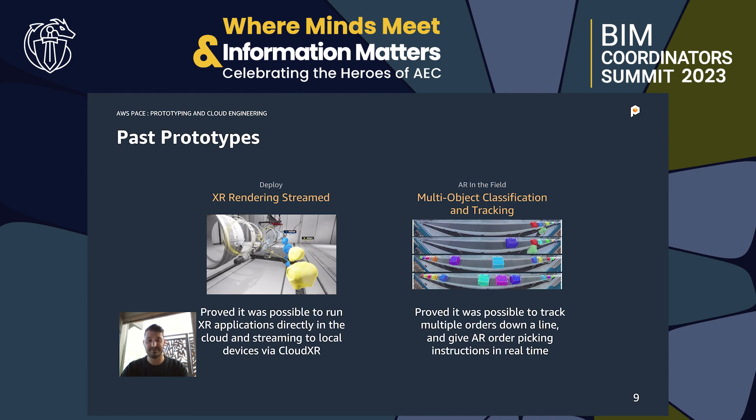Our team is not specifically focused on AEC and real estate and digital twins, but we do work on those quite a bit here and there. Since I am sort of the AEC expert on the team, I am working on those projects more frequently. A few past prototypes, fun things that our team worked on: XR streaming, some computer vision, object classification, photogrammetry, so 3D scanning pipelines for NeRF and LiDAR and photogrammetry, so reality capture mechanisms, and then NVIDIA's Omniverse and how to deploy that on our infrastructure.

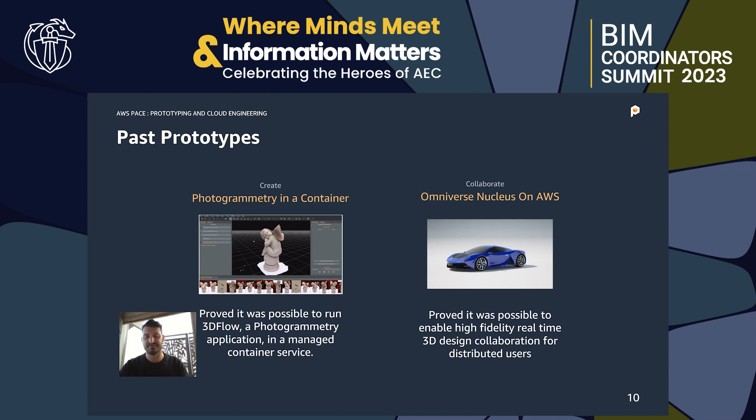I want to take a moment there to talk a little bit about AWS itself and what AWS is. I'm sure a lot of you already know, but if you don't, AWS was born because Amazon built Amazon.com, and it was one of the most scalable web applications and web infrastructure out there. Amazon.com needed to be accessible and secure to millions of people on Earth. We realized that the infrastructure they built could be useful for anybody trying to build any type of application or workload on the cloud. So that's what AWS is: it gives anyone, any company, any developer the ability to access and build on top of the same infrastructure that is used for Amazon.com.

So a little bit of overview of spatial at AWS. There's lots of spatial problems now.

Three-dimensional data is inherently important to every industry at this point. More stakeholders are requesting 3D model data. Stakeholders are more distributed, and the physical and the digital worlds are converging. Speaking to digital twins, immersive hardware is more scalable. The tools, the physical products are getting better and better.

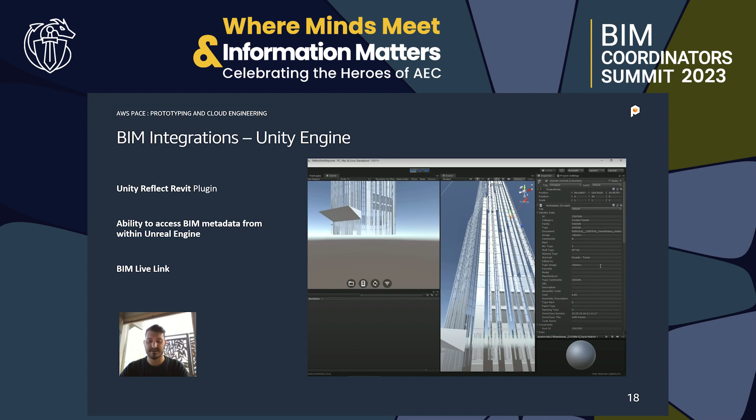One is in game engines. We talked about these game tools that are so exciting. How do we bring this building information model data into game engines, into Unity Engine and Unreal Engine? You're able to now access all of this building information model data in these real-time engines, which allows so many different use cases because these game engines are able to develop and deploy applications to many different mediums.

In a real-time engine, you're not just building a mobile application or a web application. You could also be building a virtual reality application, an augmented reality application, an application for a VR cave, some random hologram device, or any medium. This is a cross-platform development ecosystem.

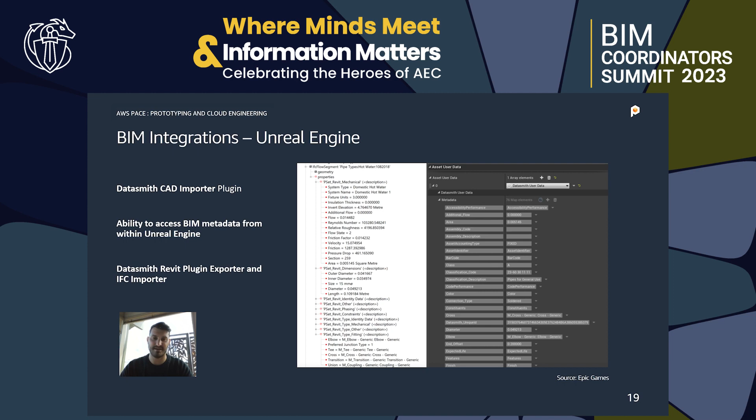So now you're exposing this BIM data to develop applications for anything. And that's really exciting. So Unreal Engine - Unity has Unity Reflect, which makes that really easy. Unreal Engine has the Datasmith CAD importer plugin, as well as the Datasmith Revit plugin exporter and an IFC importer. So there's multiple ways that you can get this embedded metadata into these applications and then start building business logic around that.

So those are both real-time engines, so you can build for many platforms. And then there's also web, which is really, really important. Autodesk Platform Services makes it really easy for people to build web applications that are pulling 3D model data and its embedded metadata into web applications, and then you can build business logic around that.

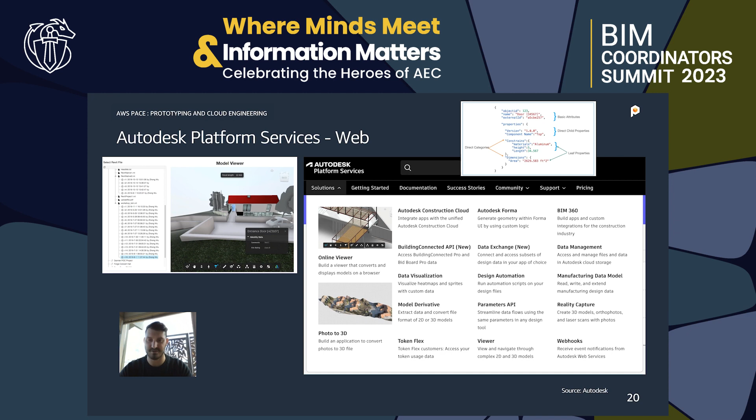So all that's to say is that now we can grab that BIM data and those 3D models into any type of application and expand and build and tie into all of that existing work that we've done, that we've put into building those 3D models. And that's really exciting.

So some fun topics that I want to cover here in the end of the presentation. The last bit here is we need things to become easier still, right?

If you wanted to tie in this interoperability and build a custom tool, there is a certain level of software development experience that you need. But there are a lot of out-of-the-box tools that are making it very easy to leverage this information without needing those skills. So I'll talk a little about some of these abstractions - this is a really important piece, abstracting a lot of that complexity away.

Another exciting thing to talk about is a tie-in between LLMs, large language models, and BIM - AI and ML, and how it's related to building information modeling.

It's so exciting that, at least from my perspective, when I used to click on an air handler, or a duct, or a piece of machinery in a BIM model, and I don't know anything about this piece of machinery - it has its product number and product name and some additional information, maybe volume or dimensions, I don't know what that is. It would be incredibly helpful for me, even through the design and development experience, let alone facilities management and operations, if I knew additional information about what this was, potentially how to maintain it, how often it needs maintenance. So we'll talk more about this, but tying LLMs to building information models to create actionable insights is really important.

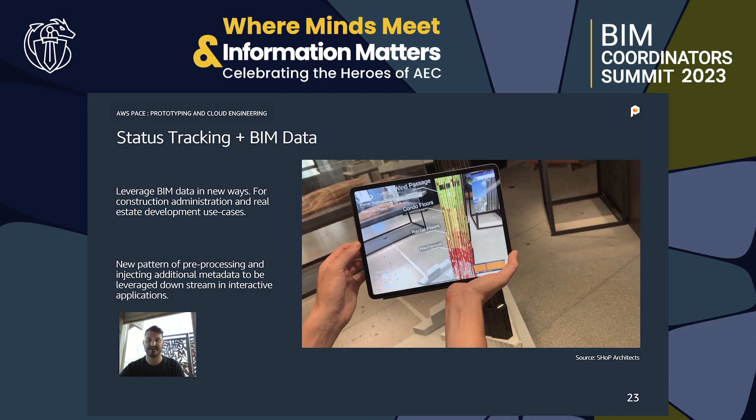So let's dive into some immersive mediums. Huge shout out to SHoP Architects for providing some of these videos - that is my alma mater, and I got to work on some of these applications.

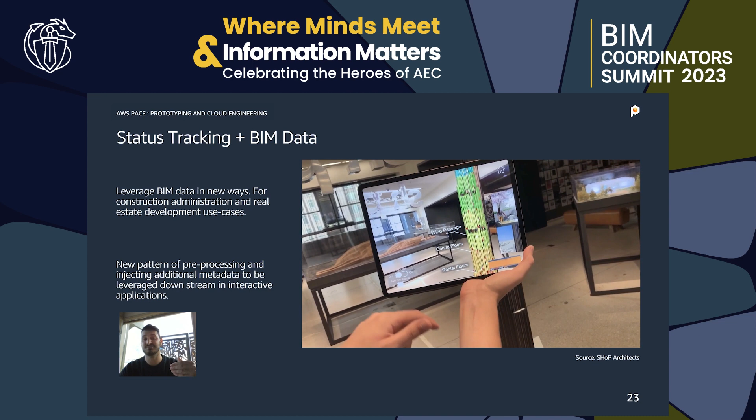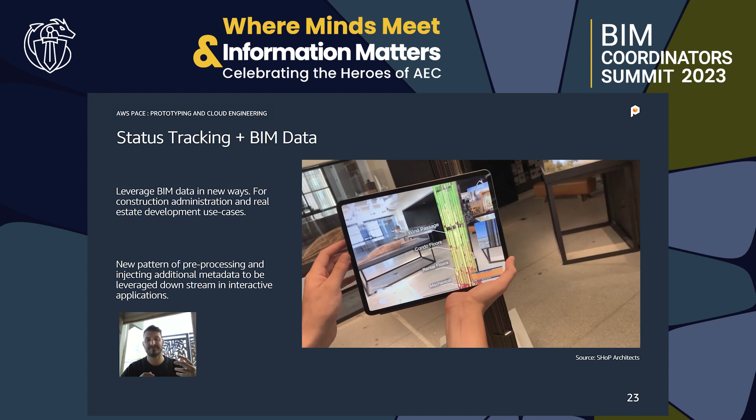This is a Unity application where we're tying building information model data directly into an augmented reality application, where we're clicking on the panels, the window panels of this tower, and these panels have embedded metadata to know their status - whether that panel has been installed, still needs to be installed, or if there's a crack in it. All of that embedded metadata can now be viewed and interacted with in a new, intuitive medium.

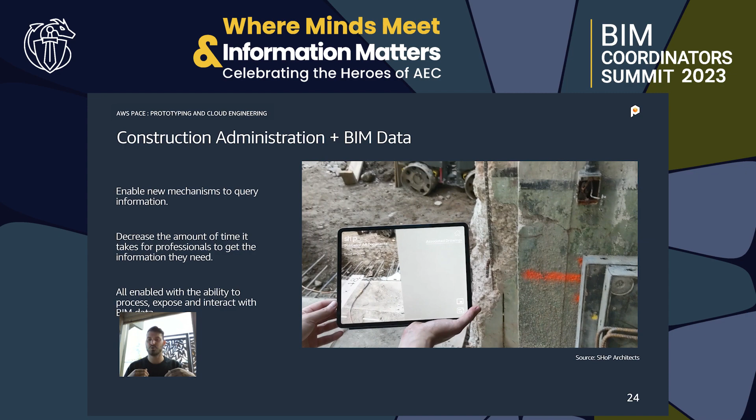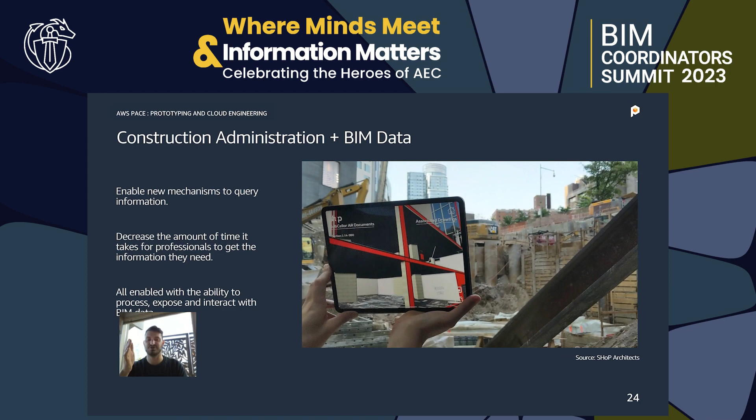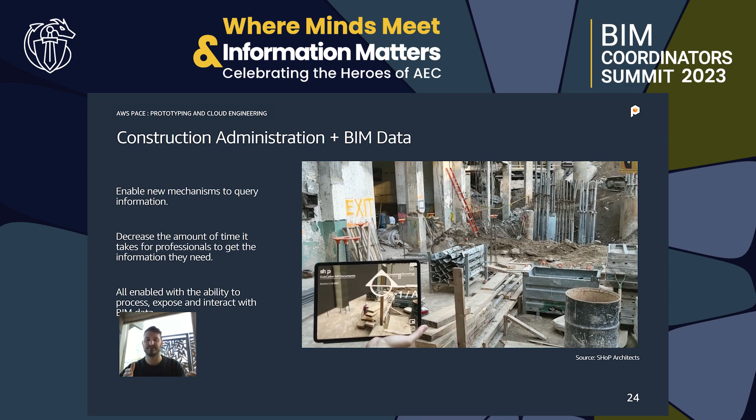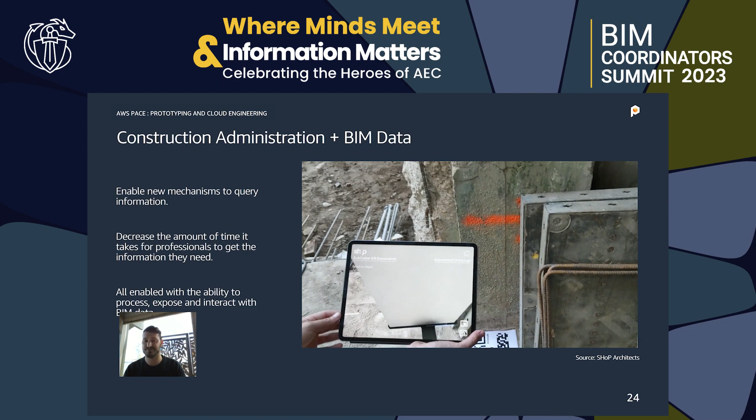Construction administration, right? I believe we're already seeing new interaction modes and new query mechanisms because of this embedded metadata. Now, as a pre-processing step, we can tell a wall which drawings that wall is associated to. So when we click that wall, we're able to pull up all the associated drawings instead of jumping between different sheets - these construction document sets can be thousands of pages long, and just navigating through them can be incredibly difficult and time consuming.

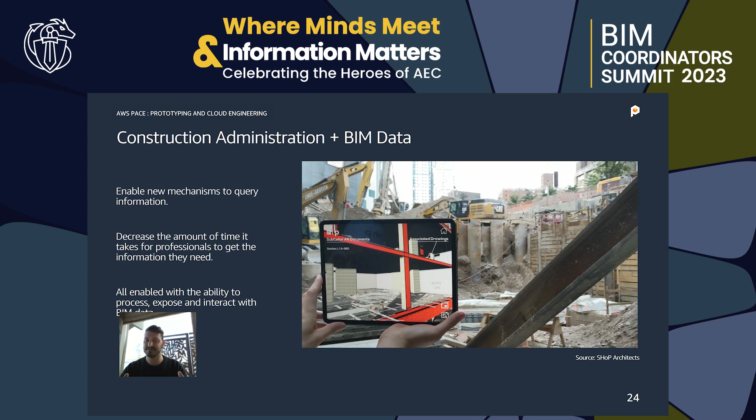If we can decrease the amount of time it takes to obtain necessary information about specific components or elements in these projects, there can be huge implications. And now tying building information model data to these new mediums can do that, which is really, really exciting.

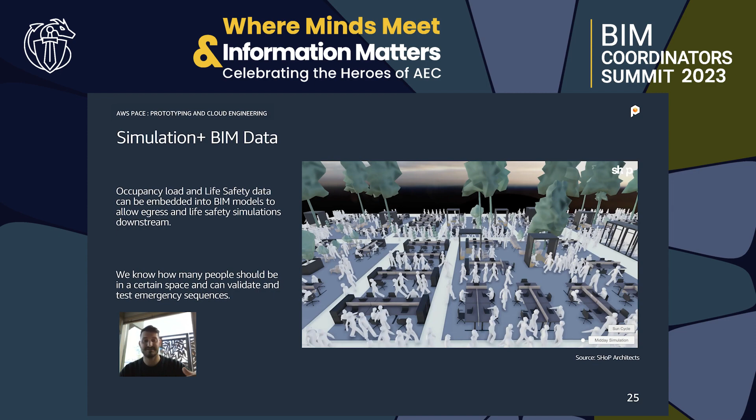Simulation and BIM data, right? If we know occupancy counts, and embed that information into these building information models, we can create and automate simulations of these spaces just by relying on that embedded metadata. That's again what tying this interoperability between software can do.

LLMs - we talked about this. How do we take something that wasn't previously actionable, and was honestly more confusing than helpful, and make it instantly actionable? That's creating easy to comprehend analysis of different pieces of information. Using large language models, we can send a query about a specific part or element that might look like gibberish to us, and now understand exactly what that is, why it exists, what it does. We can also understand how to maintain it, best practices, and things to look out for when operating this type of machinery. All of this can be done by leveraging a combination of LLMs and this building information model data, and I think we're going to see a lot more of that in the future.

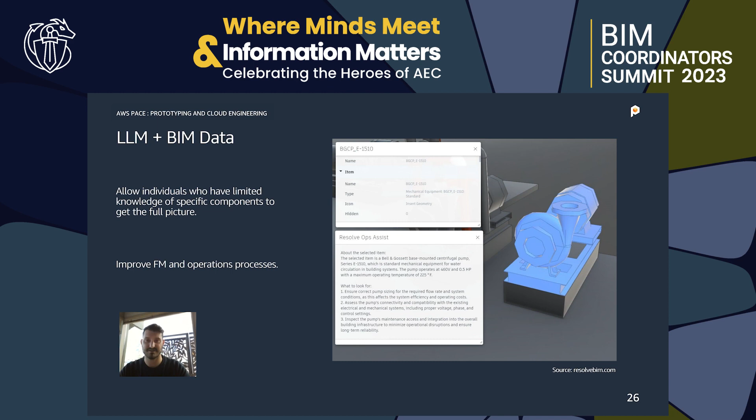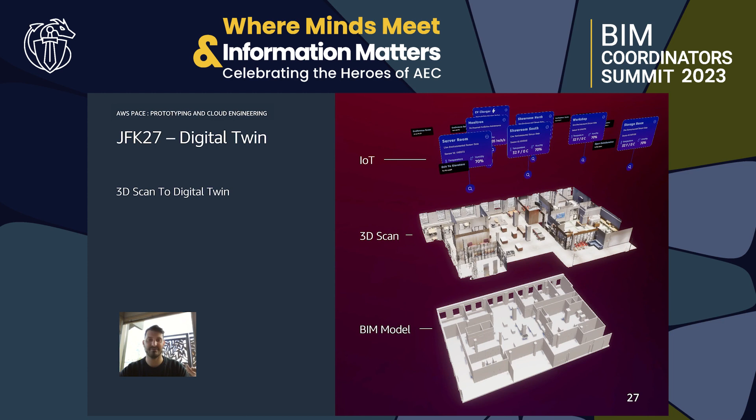Here are a few quick examples of projects we've had the opportunity to work on. We built a digital twin for a new prototyping laboratory in Manhattan called the Builder Studio, leveraging a BIM model, a 3D scan from a Matterport camera, and IoT data, pulling in live humidity and temperature data from around the environment. So this is what it looks like.

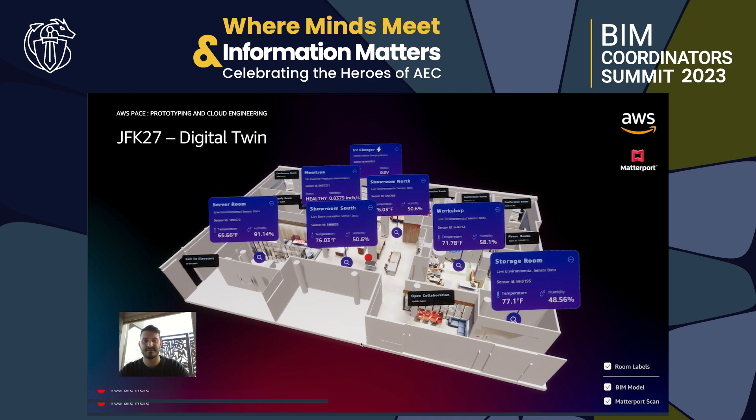I'll talk a little more about another service, AWS IoT TwinMaker. This is AWS's digital twin platform where you import your three-dimensional model and leverage AWS's existing IoT core infrastructure to overlay your IoT data on top of these 3D immersive environments. You can set up flags and indicators, so if a specific metric is below a threshold, it gives someone a warning. This infrastructure is currently under development, and they're making a lot of progress with TwinMaker.

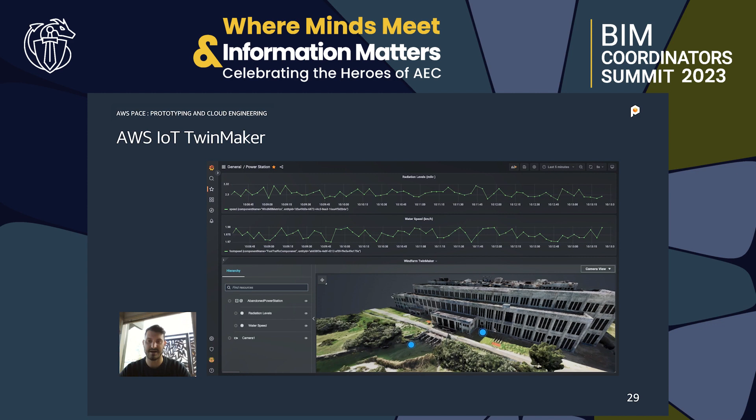Keep an eye out on the progress of this. Here's an example of something you can build with TwinMaker - a building management solution leveraging AWS IoT TwinMaker. You can click into a specific area or facility, and then start to pull information and IoT data out of that specific location.

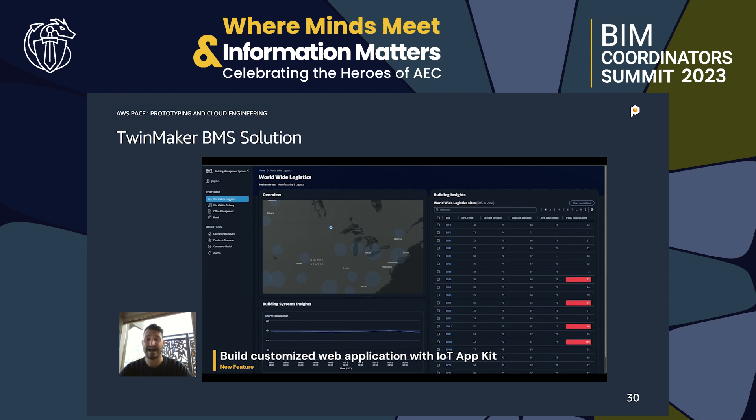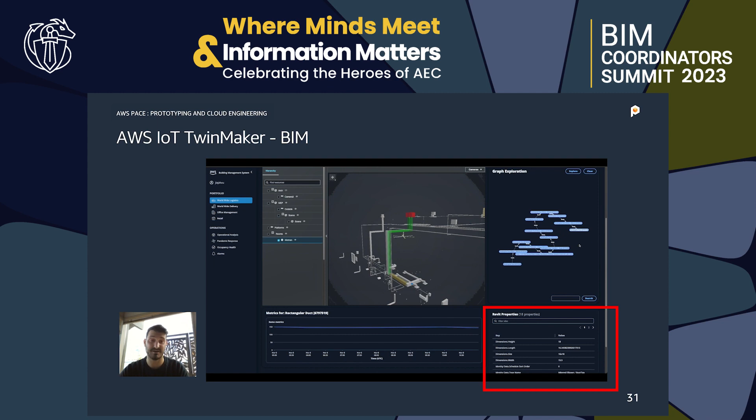To take this one step further, we are embedding these three-dimensional building information models into AWS IoT TwinMaker. We're creating knowledge graphs on the top right, representing relationships between different elements within this model. As you're navigating through this model, you're pulling that building information model data into the bottom right. This is a demo of AWS IoT TwinMaker - it isn't all embedded into the service yet, but it's a great glimpse into what's already possible and what's going to be possible shortly.

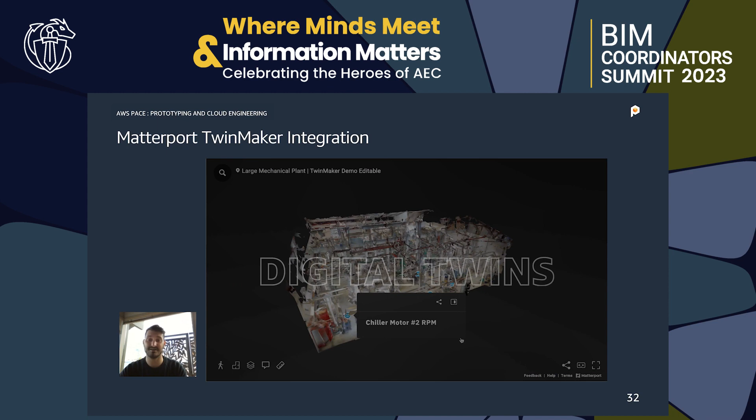We now have a partnership between Matterport and TwinMaker, which makes it very, very easy to pull Matterport scans into AWS IoT TwinMaker and build digital twins very quickly.

To speak a bit further about Autodesk Platform Services and how we can do all of this in the web - we can pull these building information models into a web viewer, access all of that building information model data, and then overlay all of this different IoT metadata and additional IoT data within this web experience.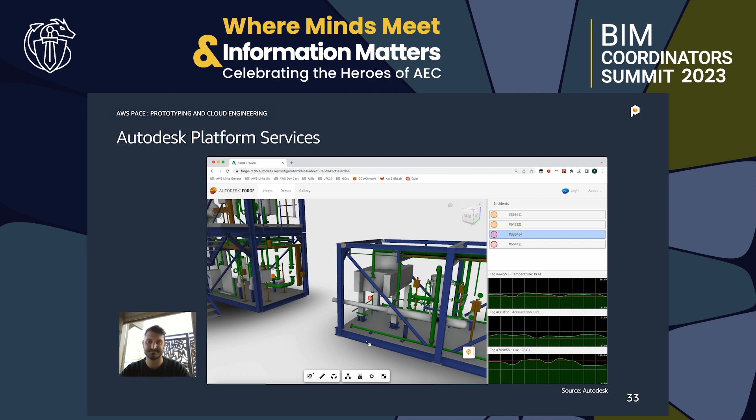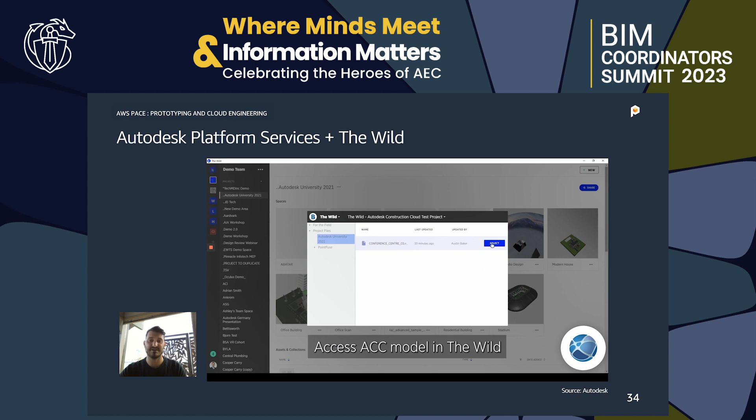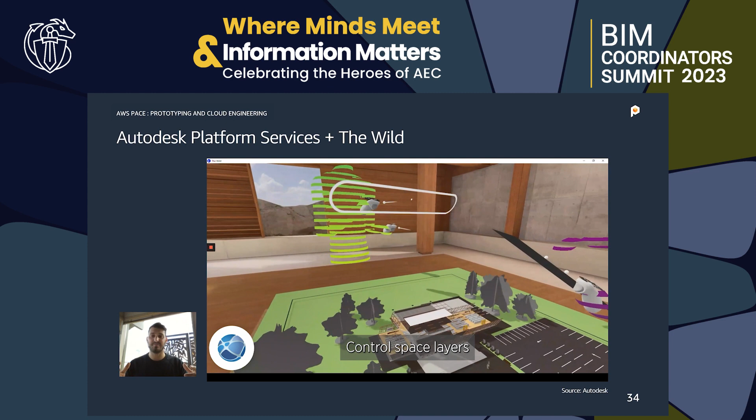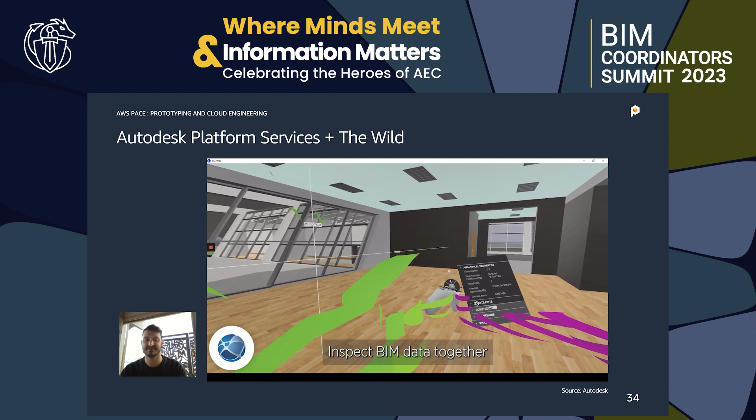Then there's immersive mediums. Autodesk acquired a company called The Wild, a really amazing virtual reality tool that allows architects, engineers, general contractors, anyone within the AEC ecosystem, the ability to jump into a multi-user experience and dive into these projects to do QA, QC - quality assurance and quality control - and facilitate entire consultant and customer meetings within this immersive medium, pulling building information model data from their models in order to facilitate.

This last one, which is fun to talk about, is SimSpace Weaver. This new service is able to create simulations at massive scales. You can bring your building information models into real-time engines like Unity and Unreal Engine, and then create a simulation - this is a pedestrian simulation.

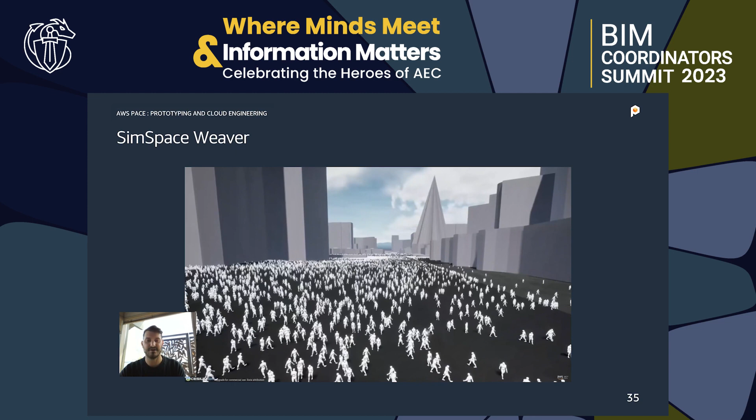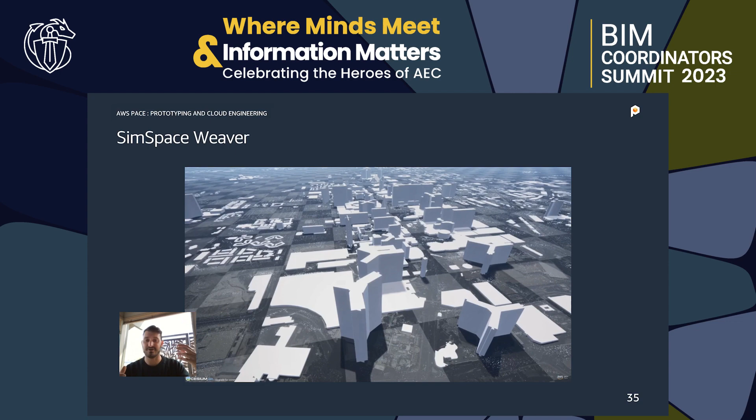A lot of what SimSpace Weaver is doing is for simulations that typically would be much too large to develop on your local machine. Now you can develop the logic of the simulation and then split that simulation up into the cloud. It goes and actually runs the simulation and does the calculations, then comes back to you with the result, which is very exciting because we can build simulations at much larger scales that are also leveraging your building information models. So that is all that I have today.